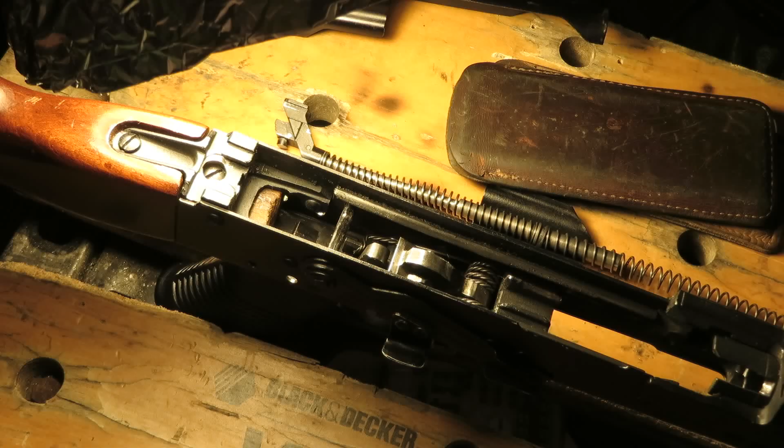Hi, so I wanted to show how a well-tuned Kalashnikov trigger works. Well, actually, any Kalashnikov trigger. This is specifically a semi-auto action since I'm a civilian in the USA and I don't have the good fortune of owning a pre-ban AK. Actually, it's a very similar mechanism to an AR.

A stock Kalashnikov trigger is very crude and rough, but it's actually one of the easiest triggers to make very nice and smooth. Easier than tuning an AR trigger, although the principles are fundamentally the same. So, the way a trigger works, as you can see, this hammer wing, which would strike the tail of the bolt here. I'll try to get that so it's not in shadow.

Okay, there we go. Basically, the hammer hits that, which is the firing pin, which sticks out of the bolt, and pushes it out of, let's rotate it around so the light is right, the front of the bolt. I think you can just see that firing pin sticking about flush the way I'm poking with my finger. With inertia and the hammer, it will actually poke out of there, probably a little less than a millimeter. Anyway, that you probably understand. And frankly, a lot of you probably understand this mechanism well.

But apparently some people who sell guns as professionally converted don't, because a friend of mine saw my nicely running Saiga and was impressed with it, and said he had one too that he had bought from a store as professionally converted, and that it would occasionally fire unintentionally. And so I listened to his description of it, and I was like, well, there's a possibility that it's him, or there's a burr or debris on the engagement surfaces of the trigger, or a failed spring in the disconnector, or it could actually be a badly done trigger job.

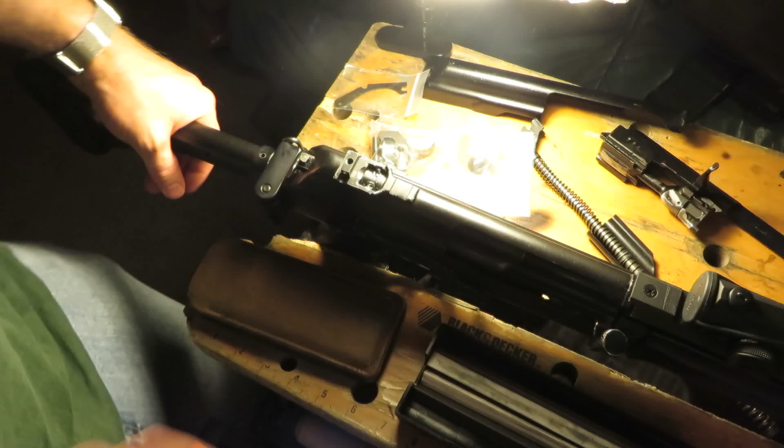So this is the so-called professional conversion that my friend bought from a gun store. I have no idea who did this, but it has an original Russian spec forend with the rail. It's got a Tromix shark brake, those are decent. This was a thing that was made, oh, it's an actual Ultimak rail. Okay, I thought it was the EOTech one.

This is a Tromix brand honey stick charging handle, but they kind of welded it on at an odd angle for somebody who was planning to use an optic. Like if you wanted to reach over the top, tilting it forward was a goofy way to do it. And it also apparently had some kind of welded on back sight. I'm not sure what that was, maybe an HK type sight. That would be the normal thing to do.

They did not TIG the holes here. They used a back block, which I'm not sure if it's welded on or not, but these are just some things: if you're buying a Saiga 12, what sets apart a professional conversion is whether they riveted or welded on the trigger guard, whether they TIGged the holes, whether they used an adapter block in the back or welded on a plate.

Can't quite see without taking off the cover whether this is a screw-in adapter or welded on. I think it might be a welded in plug, possibly the one that TAC 47 sells. But the welding here doesn't impress me. I'm not trying to be harsh on his gun. But here's the real problem that I have a big problem with, and that is how the trigger group is done. Now, as I described before, you can see, I'll go zoom in on that.

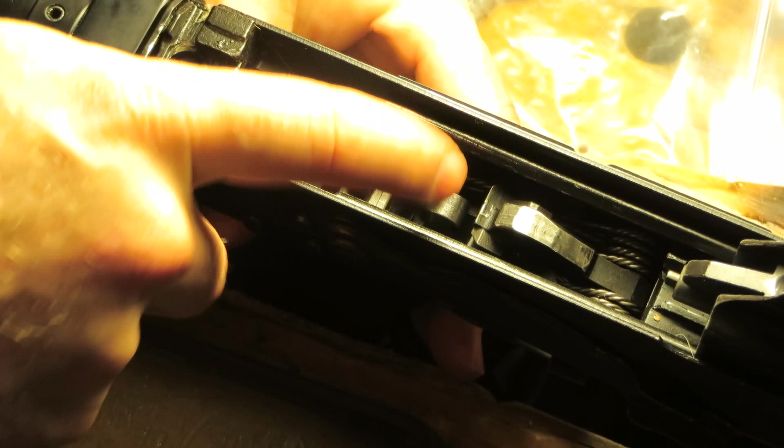The trigger group has a fair amount of hook, but they've shortened the front or the rear edge of the hook so it has less engagement. This is a single hook trigger, and they did some profiling on the hammer face, but it's basically square on the front edge. The rails haven't been polished, which I wouldn't call negligence. It sort of depends on the price point of your conversion job.

They also installed the pistol grip screw in quite a weird way now that I look at it. So they didn't use the standard AK hole, they enlarged the former trigger hole forward. So the pistol grip nut doesn't have a positive stop in the rearward direction.

But if you watch, I'm going to hold the trigger, release it, and I'm going to hold it slightly forward and push this slow. And it catches on the disconnector, and if it slips off slightly, it'll do that. It just did it. It pushed the trigger forward while I had slight pressure on the trigger. And it won't do it every time.

If you hold the trigger firmly and then release it quickly, it will catch. But it's possible to make it skip. There, I actually pulled it too much. There, it hooked properly. So it's not constant failure, but it's possible to do it unintentionally regularly.

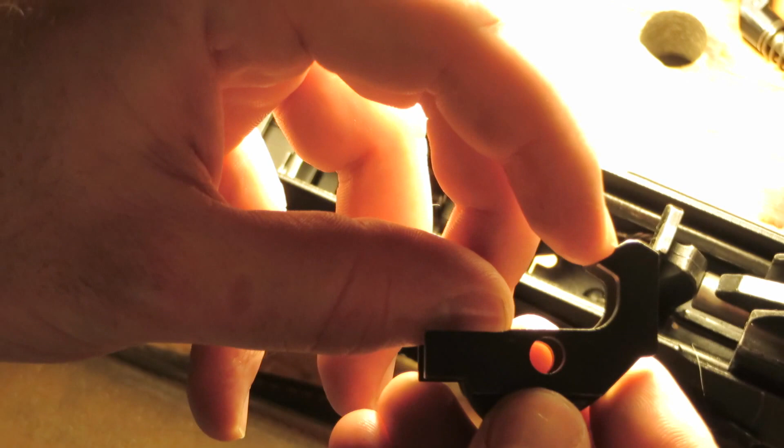They changed the angle on the front of the hook, and they shortened the amount of engagement by filing the front of the hook. As contrast, here is what an unmodified double hook looks like. The angles are the same, but they shortened this surface. Let's get that in shot. They shortened this surface on the left hook. I'm showing the right one because it's in there. And they steepened this angle like I'm showing with my fingernail.

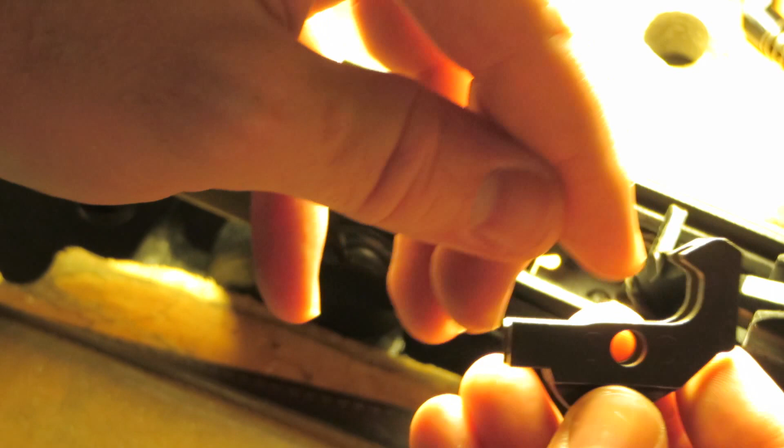And that's causing it to push that forward if it catches it with kind of impact as it slips off the disconnector and the trigger is partially pulled. It should exactly match that angle. Because they did that, they rendered this trigger unsafe.

So what we're going to do, get a pointer, is use this double hook trigger in a single hook gun. Now as it pivots forward, this corner right here will hit the floor of the receiver and prevent the trigger from being able to do full stroke. So what some people will do is cut off the hook. But no, we're going to call that a feature, not a bug. And instead we're going to cut a step in this trigger so it just barely runs into the floor right when your trigger has released, therefore eliminating over travel.

You now have an over travel stop that cannot wear out or rattle loose ever. And so you get a nicer trigger with a smoother, shorter throw. And on the other side back here, we can normally use the trigger guard screw or rivet to hold a washer down that will sit underneath where the knife point is here, and that will eliminate your pre-travel. Now, if you go and eliminate too much pre-travel, you won't have sufficient engagement and you will have an unsafe trigger. You need to have at least 1/16 of an inch of engagement on the hooks. The exact amount for your gun will vary.

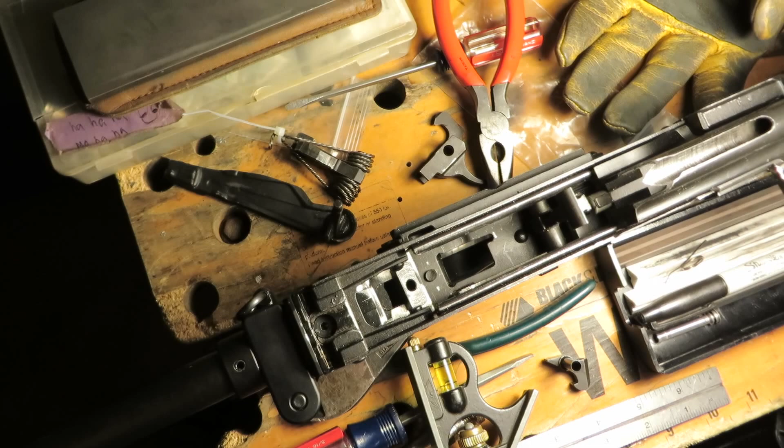So, next thing is that I'm going to pull the trigger group out of here. You don't need to see that. Look at, say, Carolina Shooter Supplies videos if you want to see how to do that. But what I want to show here is how you modify the trigger group. So this point here will run into the bottom of the receiver. If you look into the receiver, you will see there's a slot on this side for the hook to go through. So right there. It's kind of hard to indicate. And on the other side, there isn't.

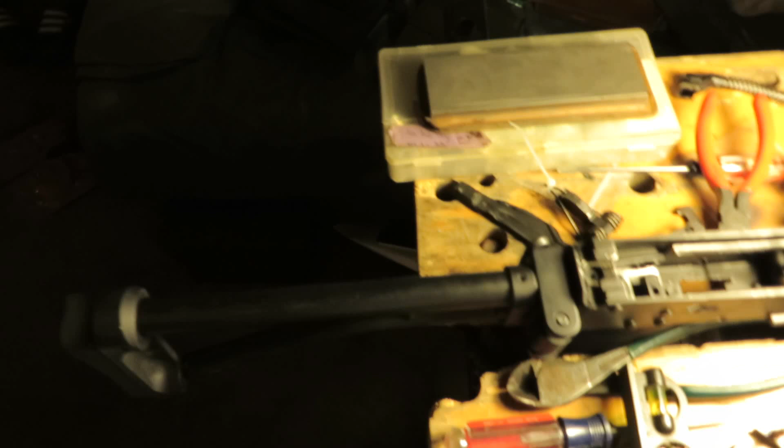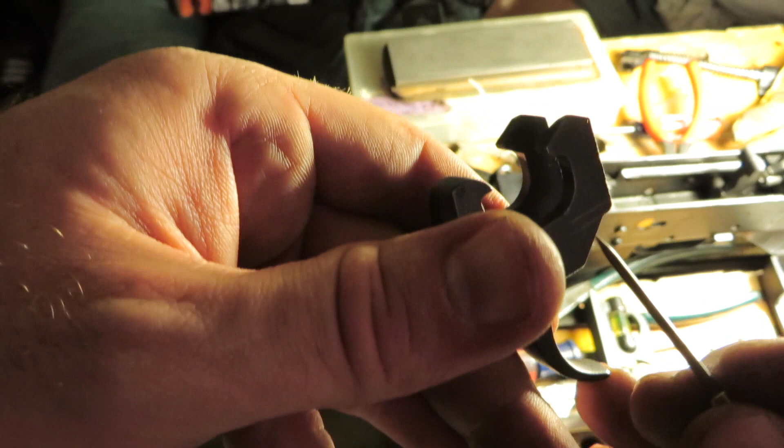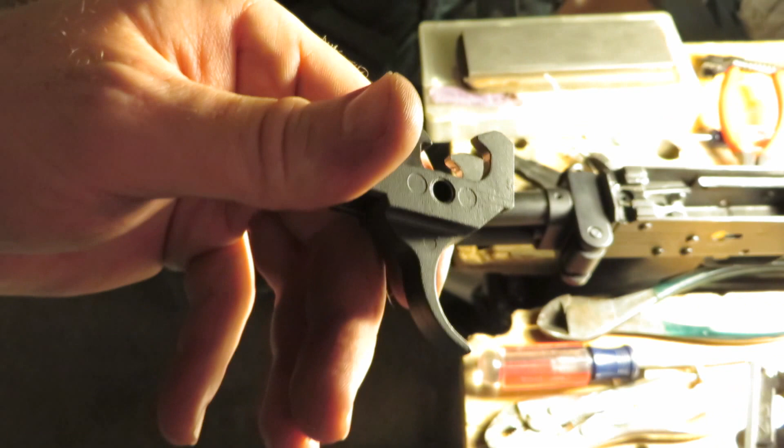So this hook is going to hit, let's rotate it. This hook right there is going to hit the floor of the receiver. And the way to solve that is to cut a little step there. Now you can see I've scribed a couple lines there. The way you do that is you hold a square against the front of this like so, and scribe a line. It's much easier to do if you chuck this up in a vise so it isn't all wiggling around like it is in front of the camera, but you get the idea. Very small increments in change here make big differences in the amount of trigger travel.

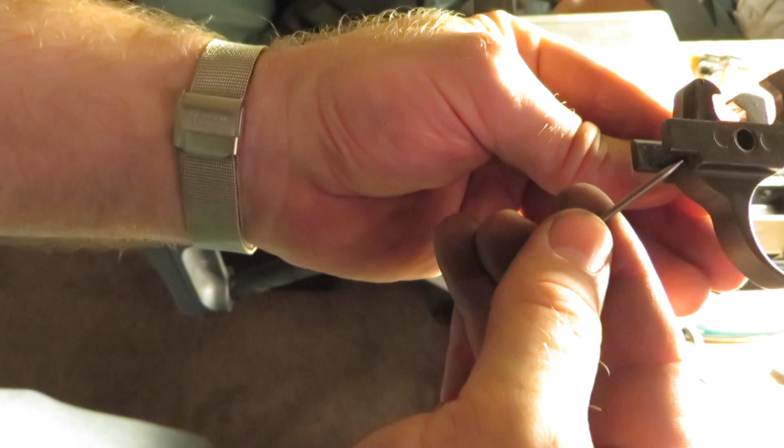So if you think of this thing pivoting, when it hits the floor of the receiver it stops. That's your over travel limiter right there, when that bumps the floor of the receiver. This side limits pre-travel. Having a washer under here, which I like to cut a square washer out of sheet metal and use the pistol grip nut or the trigger guard screw to pin that down to the floor of the receiver so it can't move around. That will limit your pre-travel. If your over travel will allow it to fire and you have a little bit of extra clearance, it will be safe. Pre-travel is more touchy for safety. So leave yourself plenty of extra fudge room on the pre-travel.

So what I'm going to do now is take it outside and grind a little bit of this away and then file it. And it's going to be like 2 swipes of the file and then a check for function. Like I said, say removing a 64th of material here will add maybe a 32nd of movement in the total trigger pull. So we're going to go slow.

Okay, so I actually had footage of stoning the trigger that I was showing earlier in the group, but unfortunately I managed to hold the parts that I was stoning just out of shot. So I'm essentially recreating that footage without the correct double hook trigger, so please bear with me a little bit. So this is actually the defective trigger group that I pulled out of that gun. You'll notice there's a little filing mark here, which is proof where he changed this angle. Again, he made this angle steeper, like so, versus something like that. The original angle was approximately where the graphite is now. And it is now like that, if that makes sense.

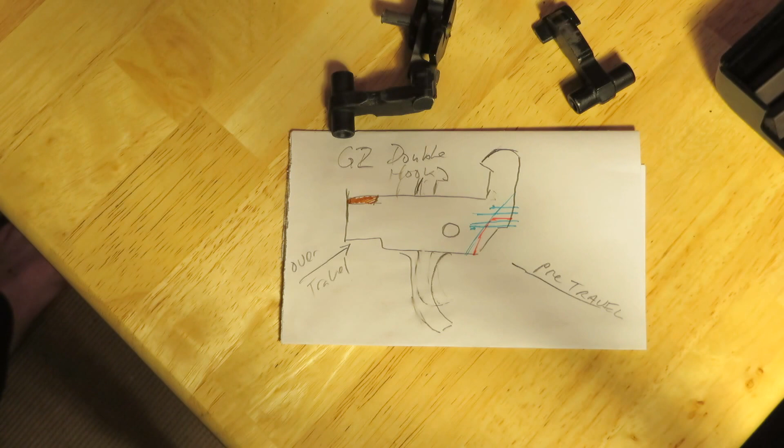So that's why this trigger is unsafe, and just the tiniest bit was clipped off of this corner right here. That was all it took to render this trigger unsafe. Do not change this angle. It's unnecessary. By all means, polish and refine this surface, but keep the angle the same, and don't round the corner any more than it is already. Almost a sharp edge, but just short of being actually sharp is what you want. So if it becomes sharp when you're stoning it, you probably removed too much material. A little bit more talk on stoning it.

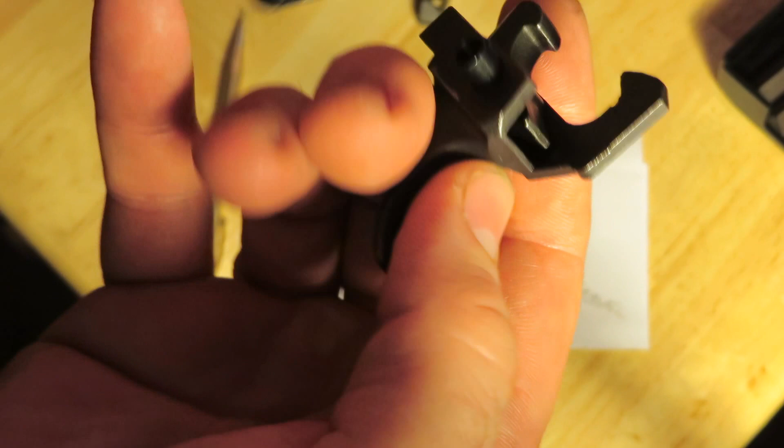So, here is a hammer. This one is from a single hook mechanism. Actually, this is the one I took out. You'll notice down the middle of this whole part is a casting line. And the disconnector, which we see here, grabs right on that casting line. Oh look, the only spot on the hammer that's rough is the only spot that matters. And the same thing is true of the underside of the disconnector. This is really hard to light in such a way that I can get that to be visible, but if you look at it, hopefully I can get that to catch.

There we go, you can just barely see the line, but there's a shiny spot right in the middle. I'll try to slowly pan this. There, you caught just a little bit of the shiny. And that tells you that all of the force on this disconnector is grabbing in one spot, and all the force on the hammer wing is grabbing on one spot. And that makes it gritty.

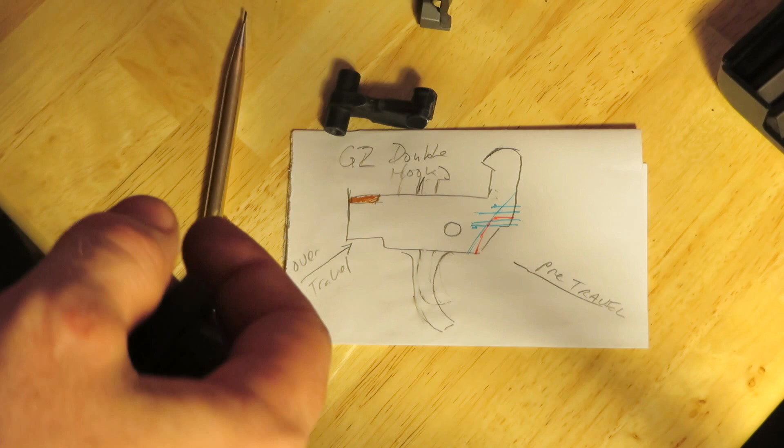Normally, you can get something like a good quality diamond sharpener, such as this EZE-LAP brand medium coarse one, and then progressively finer, and keep the angles exactly the same. And you have to take the disconnector out to get a good hook on that, because you can see that this is changing the angle slightly. But if you take the disconnector out, you can slide this back and forth and get that true. Normally that will take about 15 minutes.

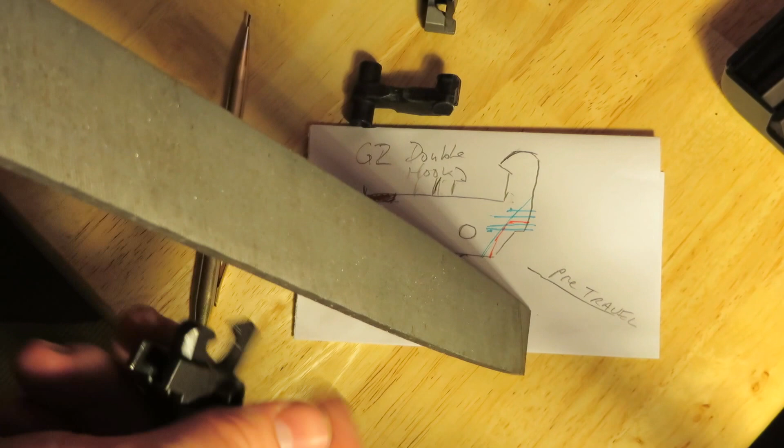The one I was working on yesterday was actually the worst I'd ever seen. I spent a long time, and I ended up taking a file and very carefully moving the part along the file, just about 2 4-inch passes, and that cleaned it up. I wouldn't recommend files to you. I would say stick with stones or a diamond file, which is much less aggressive than a file.

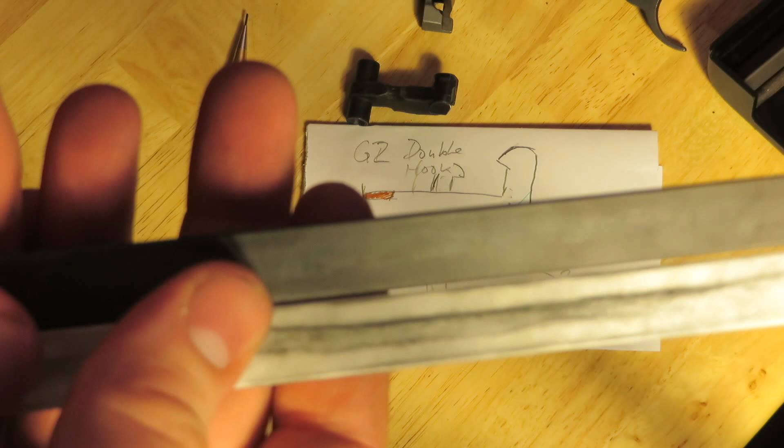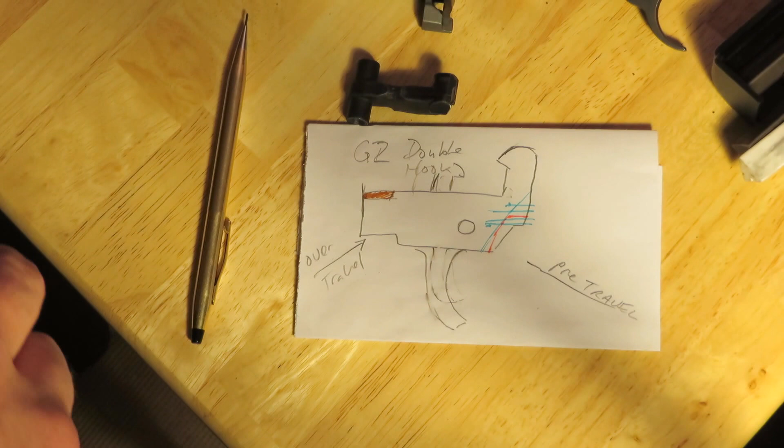And then as you get finer, either take very fine automotive sandpaper like 400 to 800 grit and wrap it around a ruler or a file and slowly move it back and forth, and you'll very quickly come to a very fine polish. Or if you happen to have it, ceramic knife sharpeners are very good. They're very consistent. You see some gunsmiths spend a lot of money on Arkansas natural stones that are very, very fine, and they make a big deal out of it. It's mostly mysticism. Honestly, synthetic materials like ceramics are more square, more precise, more consistent at their cutting rate.

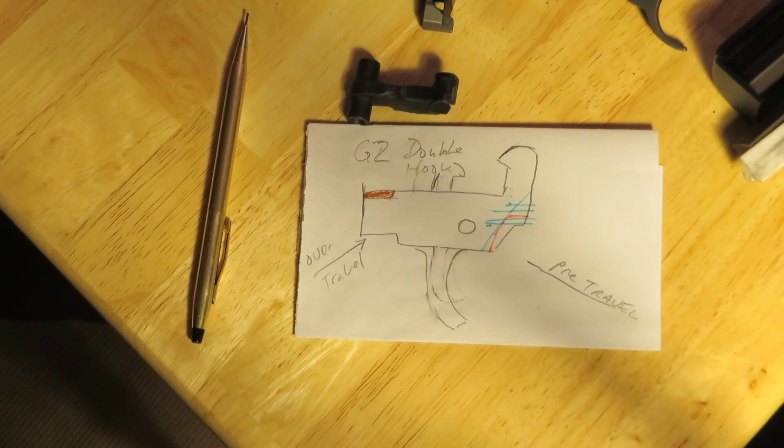So if you want a good fine polish, you don't have to spend a bunch on tools. You can literally go down to Walmart and spend $3 on a 3M multi-grit pack of automotive sandpaper and wrap it around a ruler or an old credit card and do every bit as good as those fancy stones. Helps to water it.

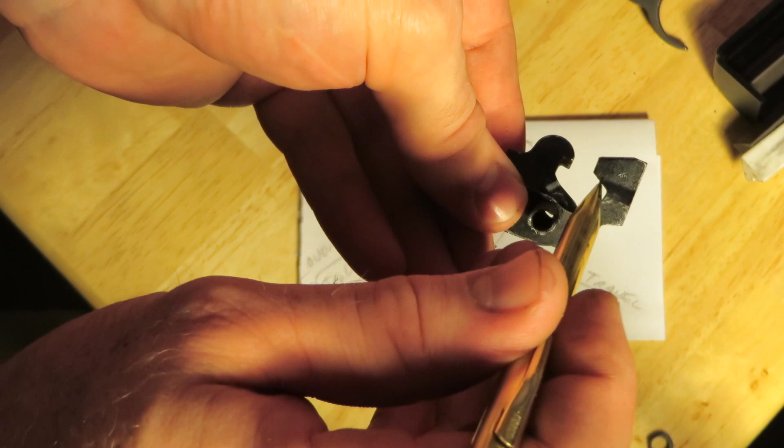And so the surfaces that you need to polish are the underside of the disconnector, the engagement surface, and when you have a double hook, you'll typically find that the planes are off in this plane. Try to keep my hand out of the light. Between the 2 hooks, and also that there's unevenness in this plane. So polishing it without really removing any metal, just uniforming it, is what your goal is.

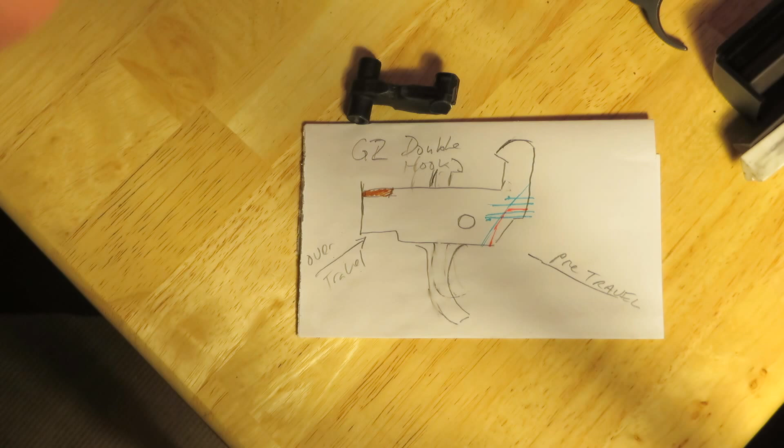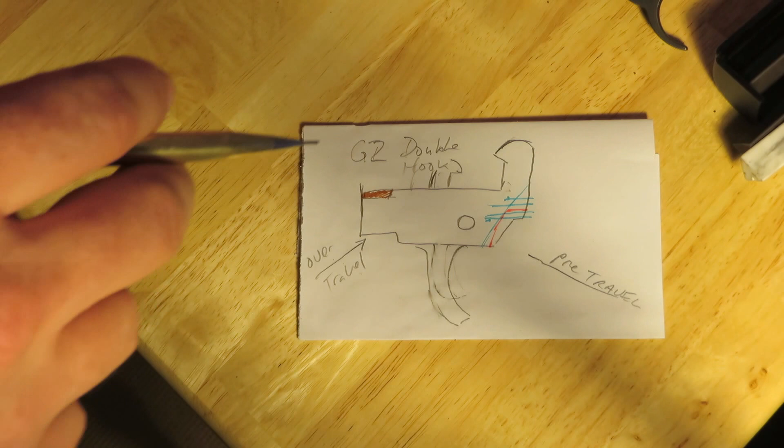This one fell apart here. Anyway, so also this surface here where the hook hooks, and on the other side there will be a bigger wing on the double hook trigger, but basically anywhere metal rubs on metal, polish it, make it shiny. Don't change the angles. What you are going to change is unnecessary movement before and after the engagement. And that's what this drawing is about.

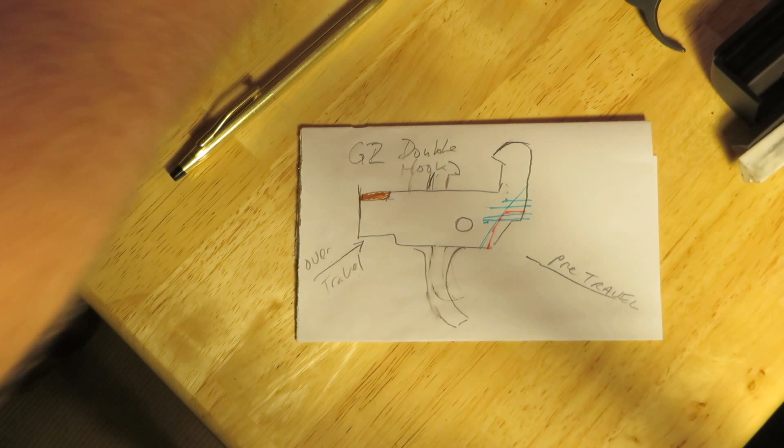I will zoom in on it in a second, but I'm going to show you a factory trigger from one Russian import. Oh, and incidentally, those casting lines are common to pretty much every AK trigger out there, except for some high quality ones like Jarred, which I wouldn't buy because they break, and the RSA Red Star Arms, which is an excellent adjustable trigger. But even that is improved with a little bit of a polish.

So here is a factory trigger group from a Saiga. It's just the same, except for, oh shoot, well, that thing fell apart and I can't push it back together, but this little bit here is an over travel stop. As the trigger rotates forward, it limits its travel.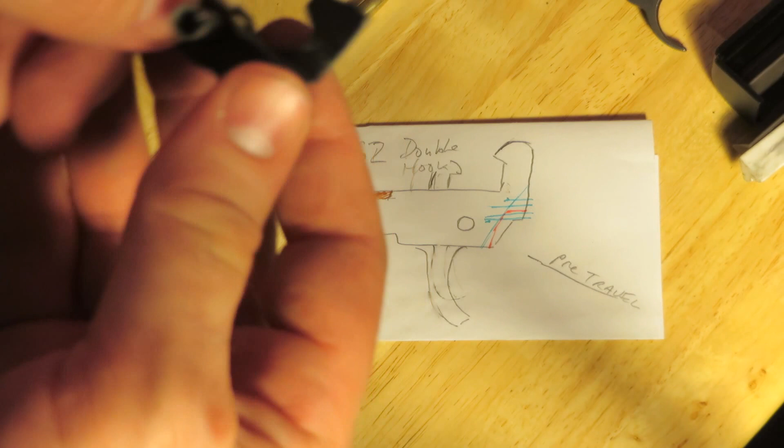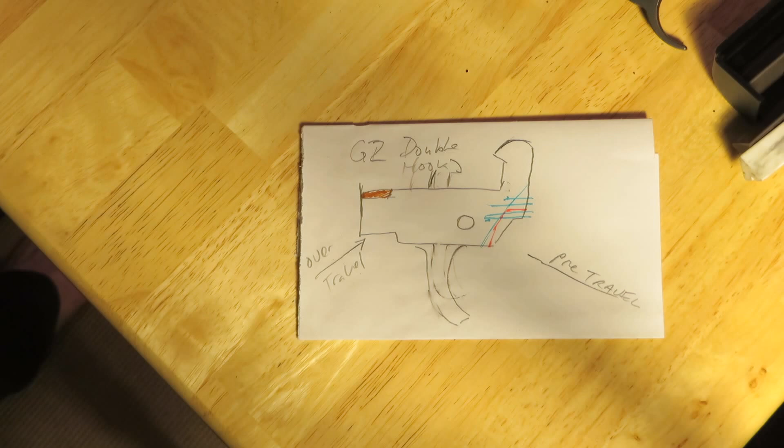Various AK trigger groups use different mechanisms. Some AK types have a rivet that limits pre-travel and another rivet that limits over-travel that the trigger body will bump into, or some feature added onto it. Having those rivets too tall or too short or in the wrong place can cause awful trigger slap, as can also the carrier hitting this portion here if it's a trigger group that isn't really intended for that spec of AK.

And that will be quite painful if you're getting that one. So anyway, how do we limit over-travel and pre-travel? You have to start with a double hook trigger in a single hook gun.

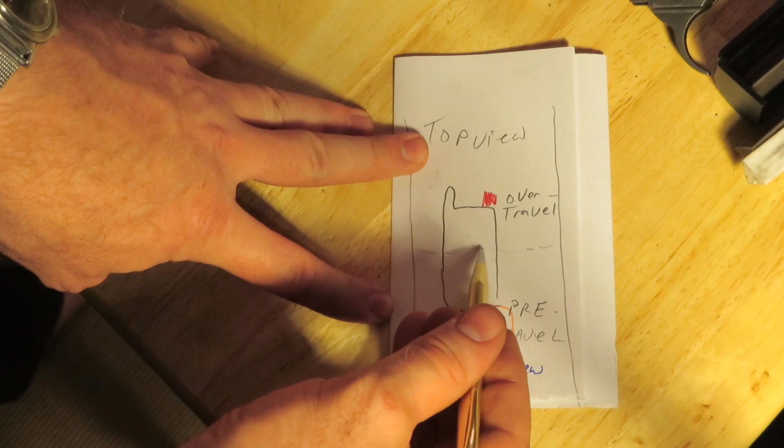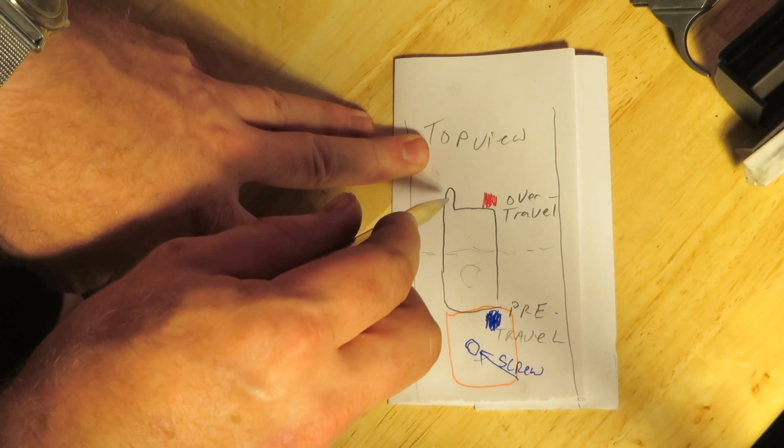And the reason is, if you look at, and this is a top view of what you would see, the hole cut out through an AK that the trigger body goes in. This dotted line here, which shows up faintly, would be roughly the pivot point. The body of the trigger is here, the hooks are up here, the disconnector would be about here. And there's a little cutout in the floor of the receiver for the hook to pass through, right there.

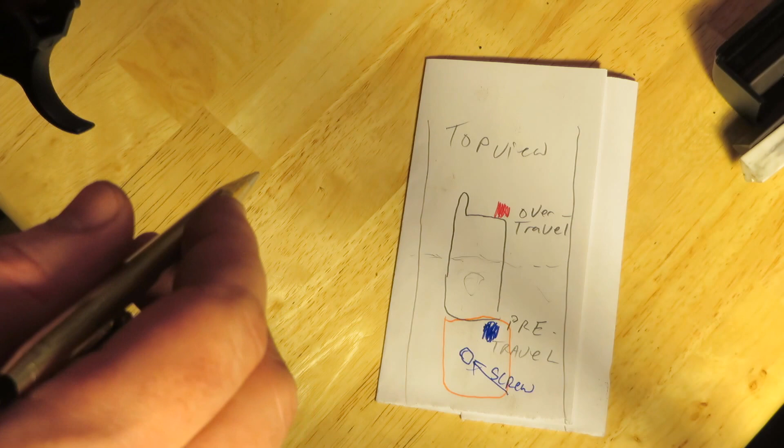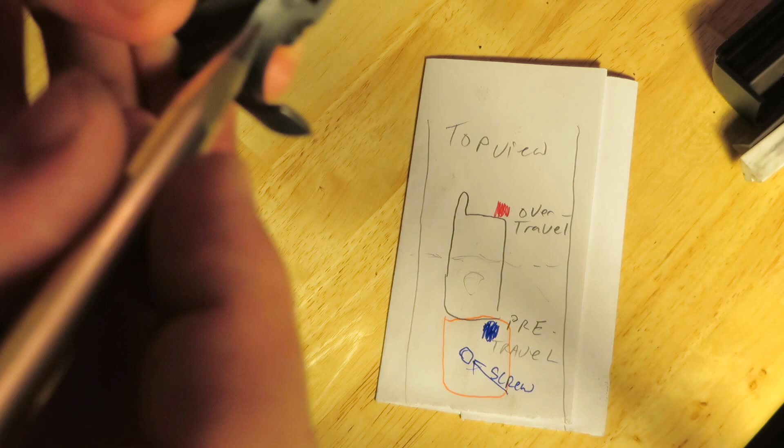But there isn't a cutout on the other side. So if you put a double hook trigger, it will hit the floor and it will not pivot, and you can't make it work. So you can cut the hook out of the way. But actually what you have there is a huge advantage. You have some material built in as an over travel stop that you can adjust. So the first thing you're going to do is basically shave off a little bit of material right here so that that will clear the floor.

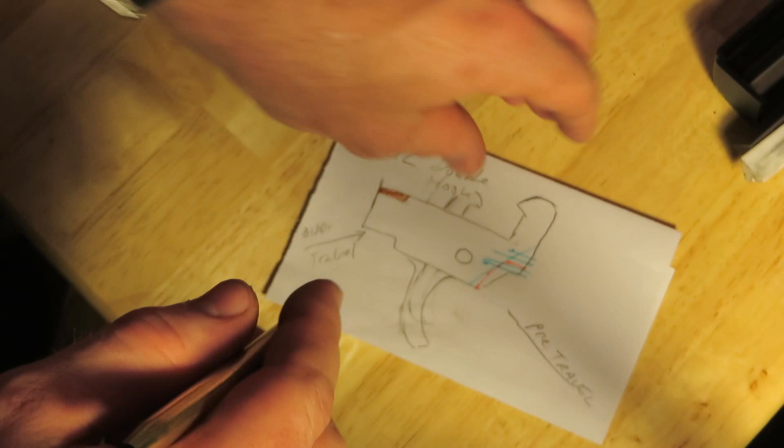So here is a drawing of the G2 double hook before you've modified it, the pencil lines. And what we're going to end up with is approximately the red line. So we've clipped off a little bit off the front of the body to make sure it clears the floor. Do make sure that happens, otherwise all your adjustments here will be wrong. If this is hitting the floor, you need to just trim it back just a shade more. And we're talking about hitting in this area right here.

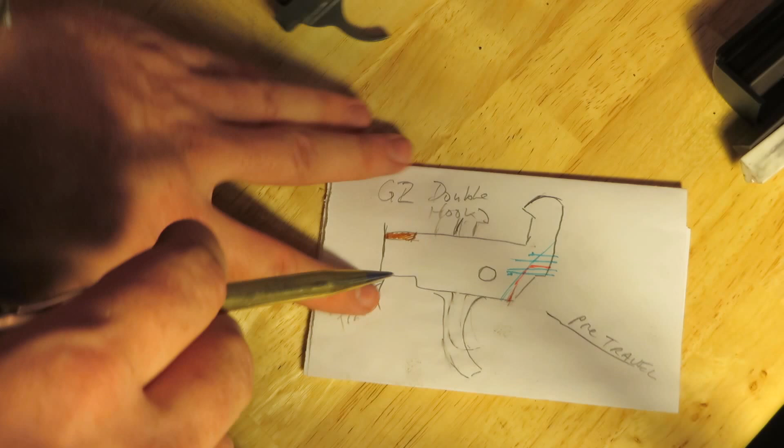So you don't have to take much, maybe a 64th, maybe a 32nd, it kind of varies, but you'll see just a shiny silver line here, and there's kind of a notchy spot there and a notchy spot there, and you basically go till the notch is gone on both sides. Let's make sure I had that in shot. So there will be a notch roughly here, and a notch roughly here, and you just shave vertically until that notch goes away.

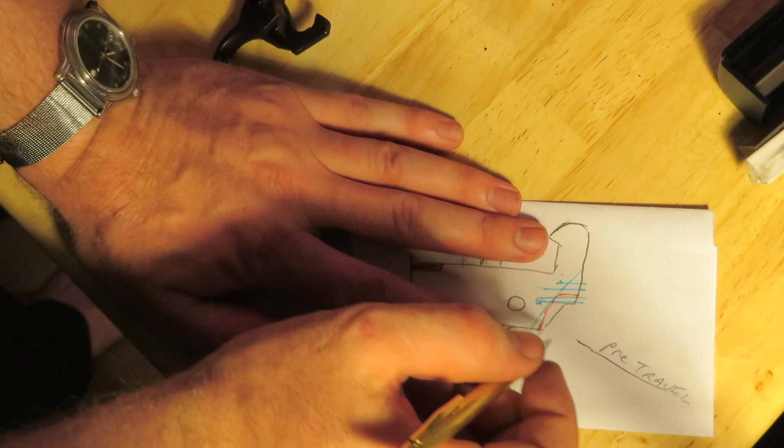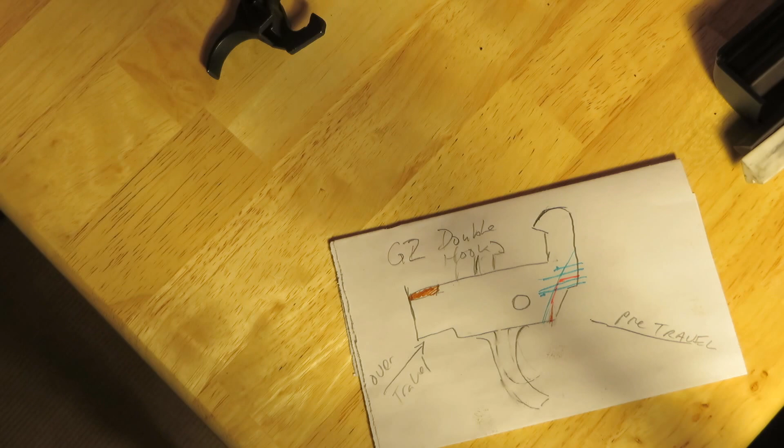I'll get into the tooling that I think works best for this in a second here. I would thoroughly suggest you stick this in a vise. So about the first thing you want to do is grab a square. And you're going to hold the square against the trigger hook. I have this on the wrong side of the trigger hook since we are dealing with double hook. And you'll scribe lines like so. Much easier to do with the trigger body in a vise so it's held steady.

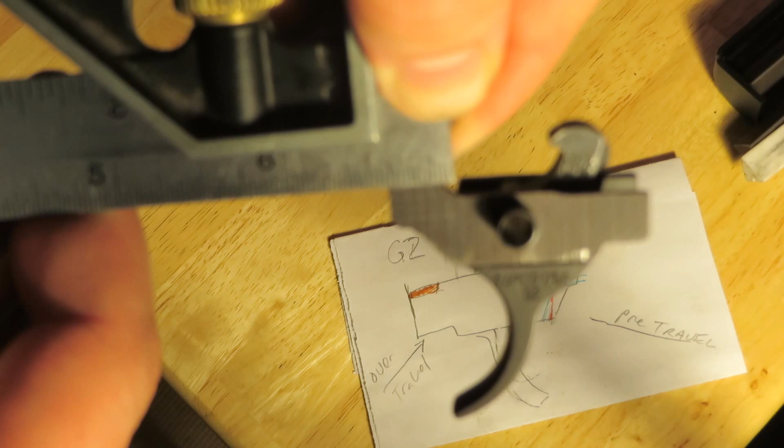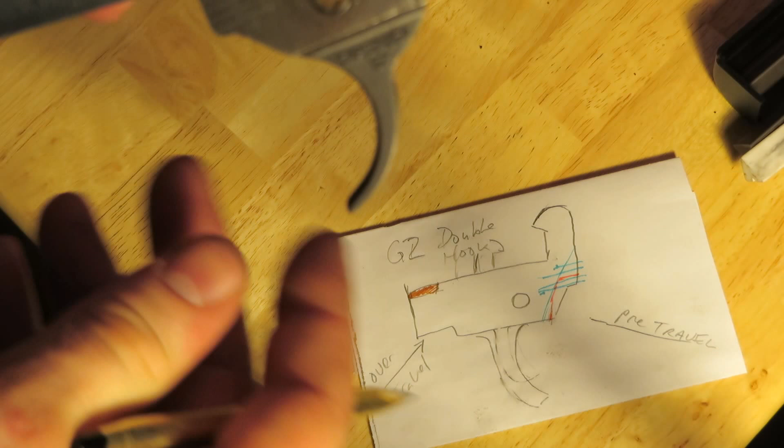And now you can see I have several parallel lines that are reference marks. And we're also going to draw another line this way to make sure that we leave enough meat on the hook, so to speak, because it's only really the corner that we care about. We're just keeping them parallel as a way of keeping track of progress. So you're putting a safety line here and measurement lines going horizontally.

Now, what you're going to do then is cut out this material here up to the first line, stick it in the gun, and push the trigger pins in and the hammer pin, and make sure that they're fully seated. You have to have them fully seated, otherwise your test fitting will be inaccurate and will cause you problems. Maybe you'll remove too much material, maybe you'll put the gun back together and the trigger won't release.

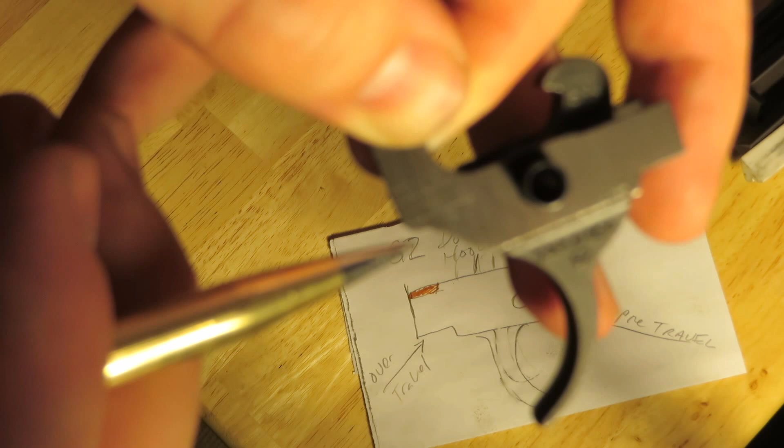Neither one is good. Make sure the trigger pins are held all the way in, and you basically function test it without any springs, with just your fingers, while holding the trigger pins, or the axis pins, in with your left hand. So, looking at the drawing here, I'll zoom in on that just a little bit more.

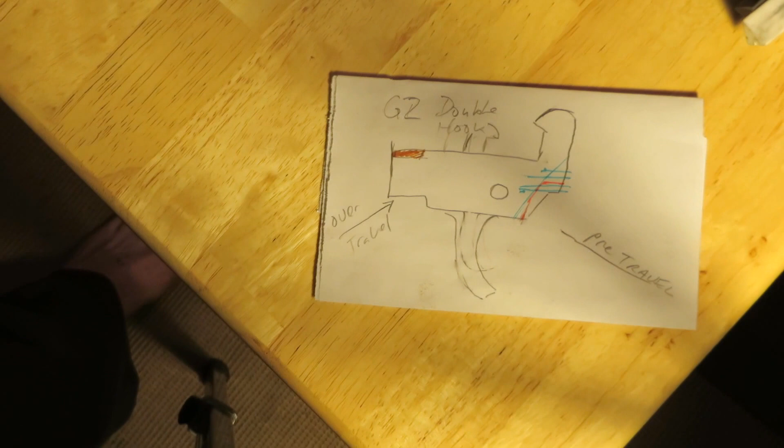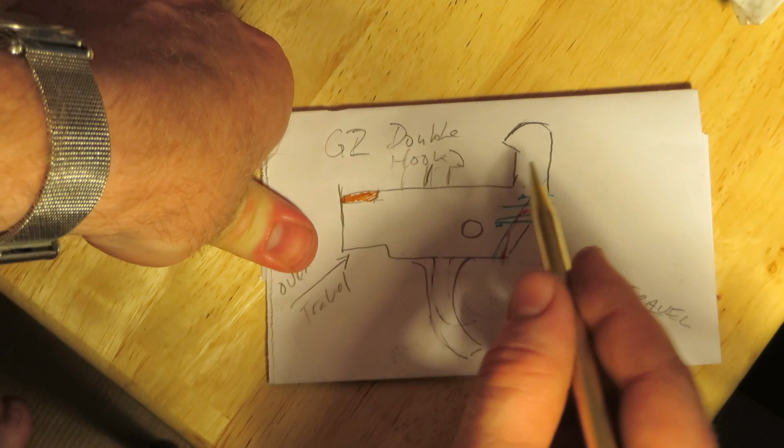So, if we look here, you'll see you will end up removing approximately 1/16 of an inch. Again, the settings will be determined by what allows the hammer to swing by, just by here, and leave you a little bit of extra trigger movement after it releases for reliability.

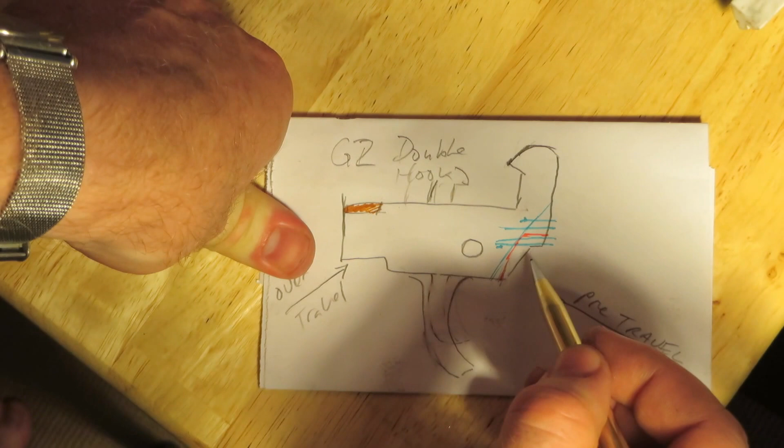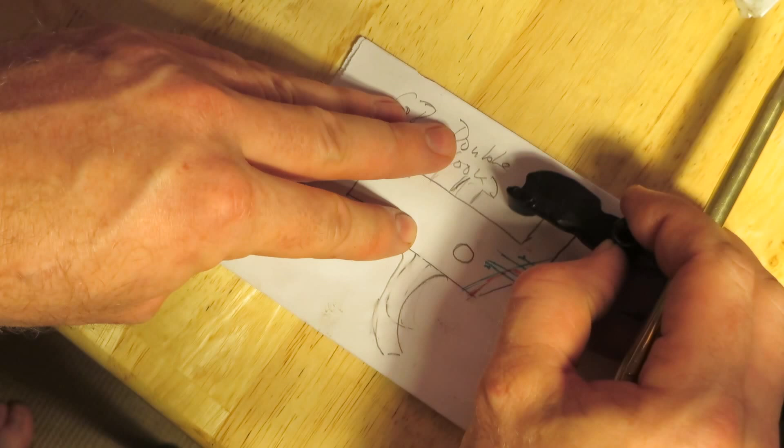Limiting your over travel can in no way lead to a dangerous condition unless you limit it so much that the hammer wing, which I'll actually just demonstrate with a hammer wing since I've got one, has to be able to get past this. So if the trigger won't swing far enough forward for the hammer wing to swing past, then you've got a problem. So you want it to be able to go forward just enough that that wing can swing by, and a little bit just for tolerance, basically.

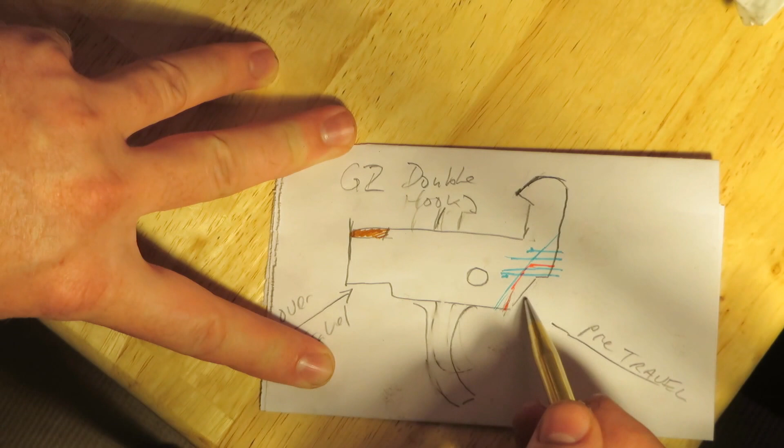So a good rule of thumb is about a 32nd of over travel is nice to do good follow through on your shot without slowing you down much. Personal taste. Some people like more, some people like less, so adjust it to what you like. And so notice I gave myself extra guidelines before I even started cutting so I can measure my progress and go and just test and fit until it works.

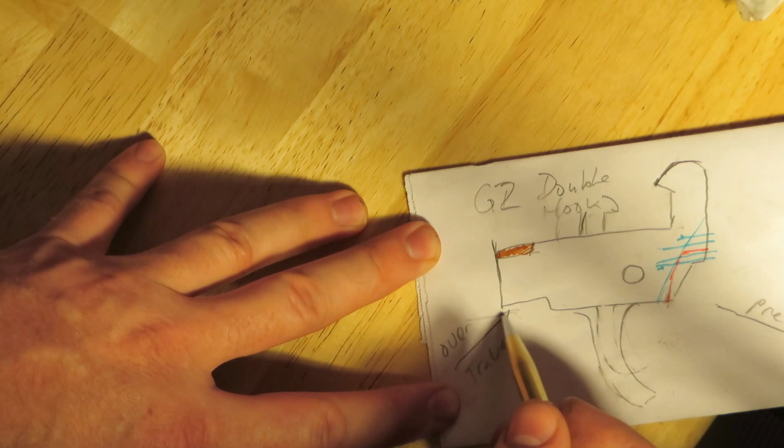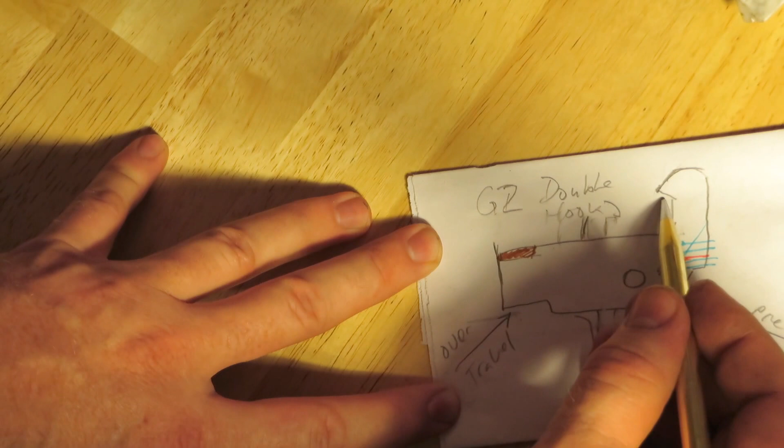Now for the pre-travel or take-up, you put a spacer under here. A large fender washer will do. You're typically looking at around a 1/16 of an inch, but the critical thing is you have to leave yourself plenty of engagement here. You want at least about a 1/16 of an inch of engagement. More is probably better. Definitely don't get down to a 32nd.

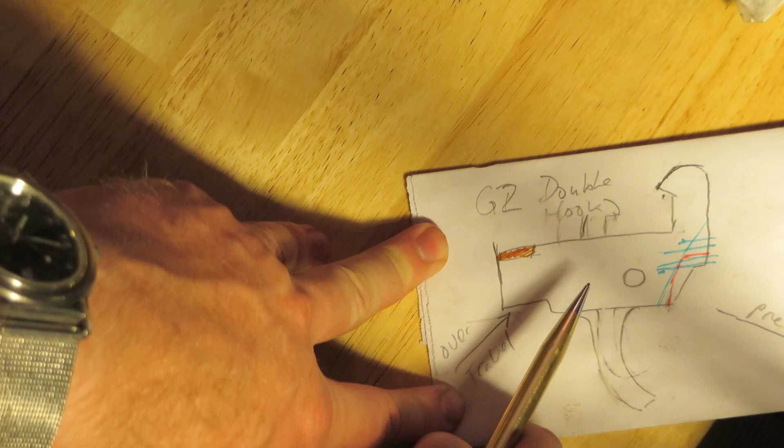A lot of the time they express these sort of things in thousandths, but the point is, as things wear, you want them to have extra safety margin, and you can get down to a ridiculously short pull and still have more than a 1/16 of solid engagement. So that is your most critical thing.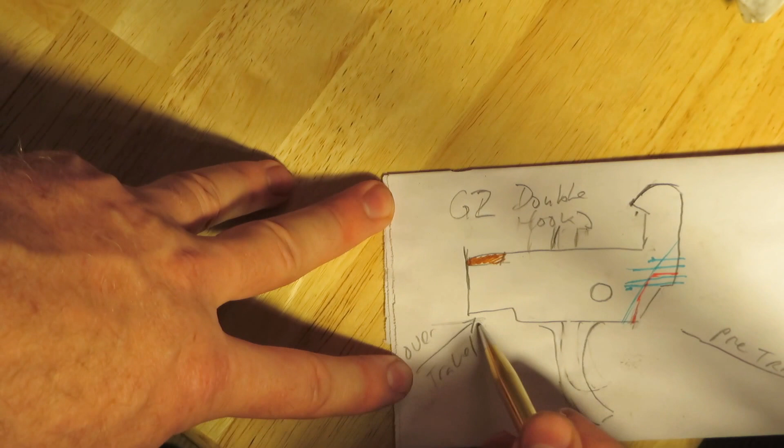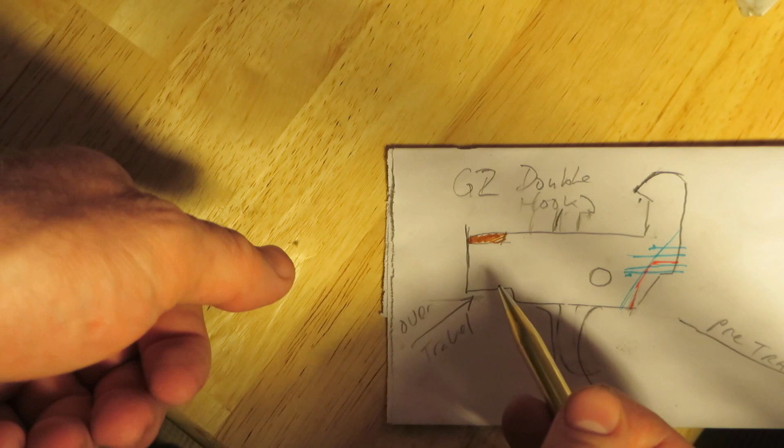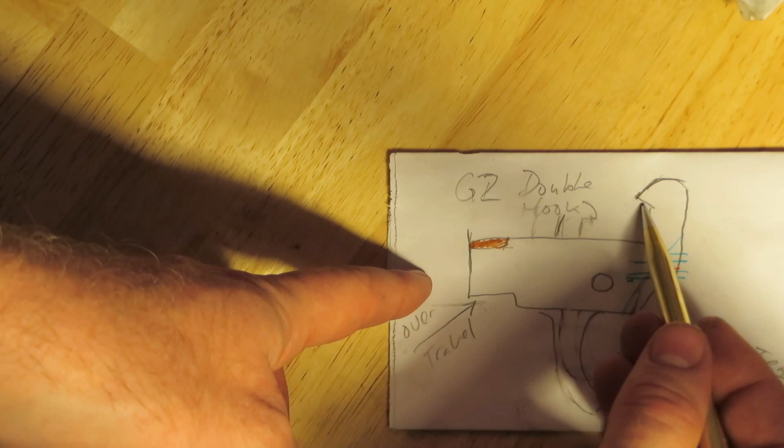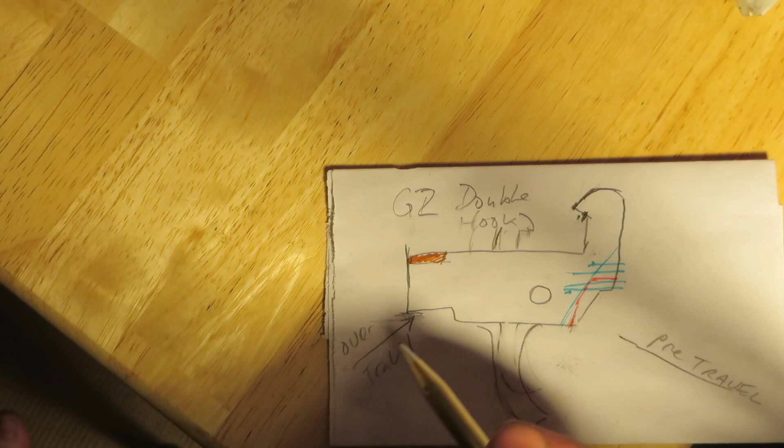A good way of checking what's going to be the right thickness of metal to go under here is to take a bent screwdriver tip and assemble your action with the spring on the hammer and basically bring it to the break point and then bring the trigger back to where the hammer is about here. The hammer wing is somewhere in the middle of that, and slide a screwdriver underneath here and mark on the thickness of the screwdriver where it is, and then cut your metal in about that thickness and file it thinner if you need to.

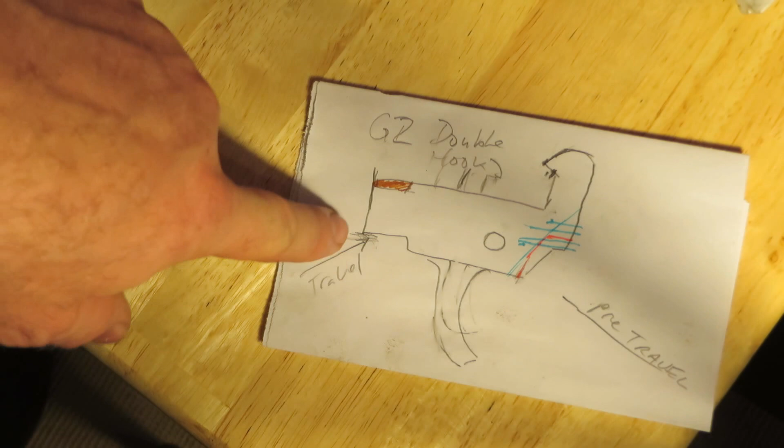Again, this is the most critical one that you can overdo and render your gun dangerous. If you don't do this at all, your gun will be safe and will still have unlimited over travel. So my point is, I don't like a part that can come loose, so I prefer it to be pinned underneath a permanent part of the gun, preferably the trigger guard rivet. And I like to make a square washer rather than a round washer, just because then it can't wiggle around side to side, even if I had a loose rivet or something dumb like that. Not that I would leave a loose rivet, but you get the notion.

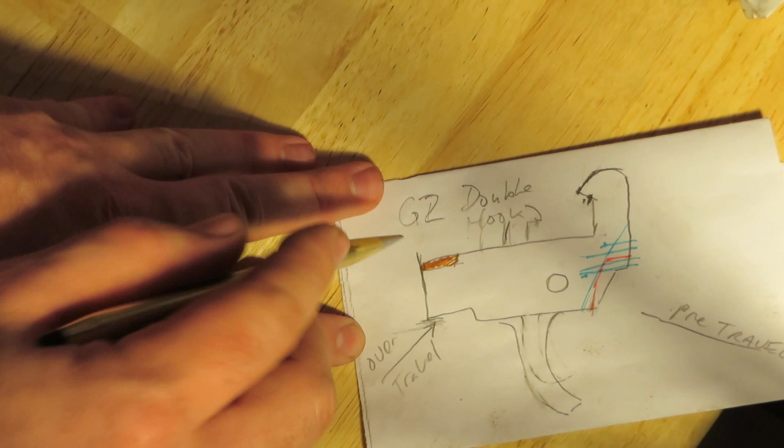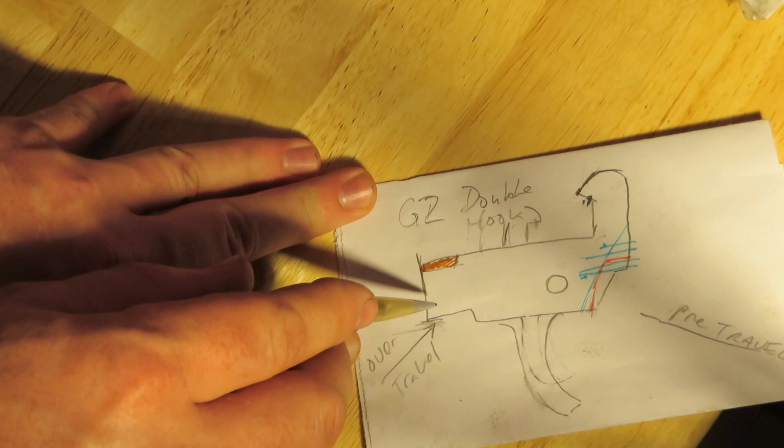And one last thing that I'm going to say before I end this clip of the video and get back to showing the actual fitting of the other trigger. If you notice this brown area here, once you limit your pre-travel, your take-up, you will often have to fit the safety. I should have taken the safety out of a gun to use here as a prop, but I didn't. So the safety tab engages roughly like this, with this corner of the back of the trigger body.

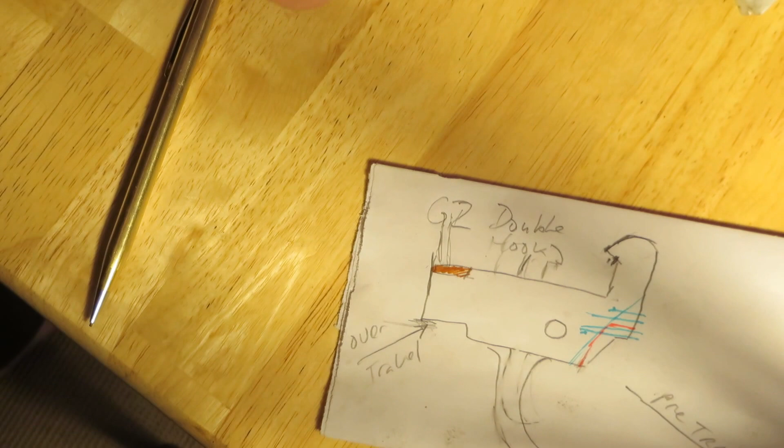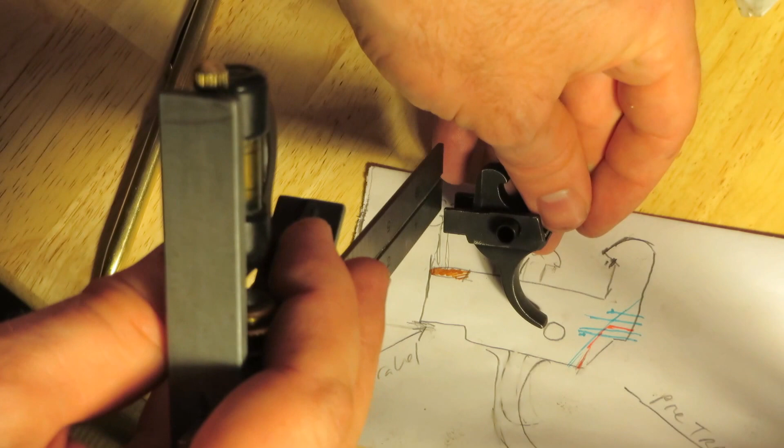Basically, it sits right here, and it pivots out of the way, and it pivots on top. Now, as you rotate the trigger forward, this will sit higher, and the safety may not slip over the top. Now, what most people will do is go and shave off a little corner of the safety. I would advise you not to do that, because right now you have the opportunity to get something a little bit nicer in your gun.

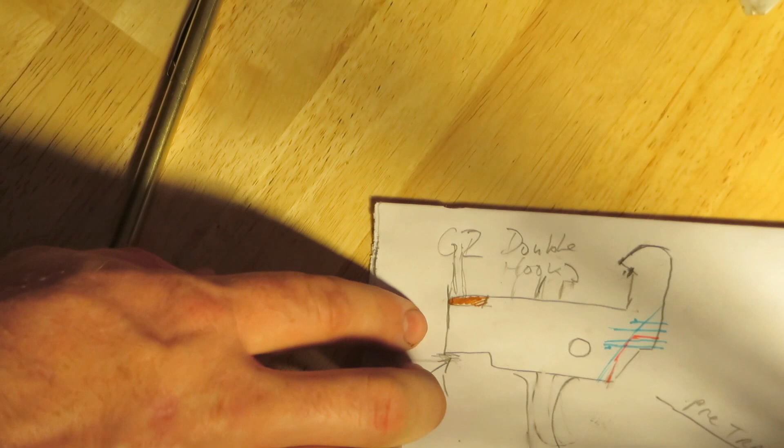Rather than fit the safety to the trigger, I would suggest you fit the trigger group to the safety. If you remove a very, very slight step where I've shown the brown here, and I've grossly exaggerated that, I'm talking about usually removing, say, 1/1000th, but the point is to kind of leave a little bit of a notch at the front of the safety stroke.

And the point of that is, what that notch will allow it to do is, as your safety rotates forward, it will bump to a stop there and cannot rotate too far upward into your dust cover unless you give it a very deliberate nudge to make it skip over this hump. And one thing you'll find with a lot of home converted guns is that their safety swings too far upward. It isn't dangerous, it just looks sloppy.

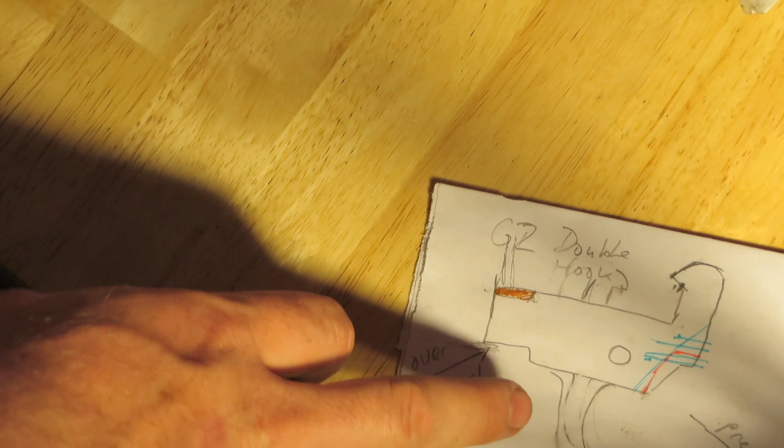So here's a way you can make your gun a little bit nicer, just that last kind of pro touch that gives it that extra attention and makes your gun a little bit nicer. I have just started the notch in this trigger spark. You can see right there.

And I basically brought it up to where the corner initially was, and I had this line scribed to give me a measurement of progress. I'll probably need to take a 32nd to a 16th more, but this is just put it in and try and see if you can get the trigger to function, or if the hammer will interfere with it, and if not, add a little bit or remove a little bit more until it works. So it's just an iterative check and fit process.

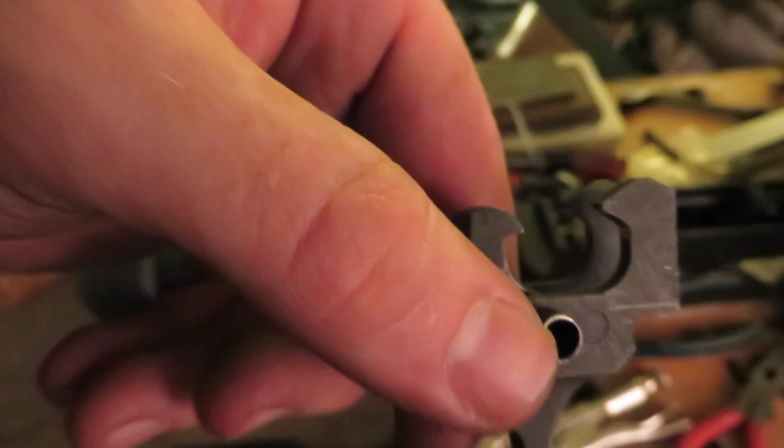So, as you can see, I removed about a third of the material between the lines. I expect I will need to get almost to the top line before it works, but we'll see here. I just keep it square and keep it parallel so I know my changes, and I keep my grind parallel to that line, and that's how I know how much change I do here is going to affect how much change I do there. If I change the angle, then I won't get the same result.

Okay, so I've switched guns to show one that I already finished, because the footage from the other gun wasn't very easy to see, but I wanted to show you here how we're checking to see the correct amount of pre-travel. And actually I'm going to pan through the gun here.

So here we're looking at the pistol grip nut, and just in front of it is a square black washer that matches the color of the gun, and you can see this screw right here, right in front of my pinky there. That is what holds together the trigger guard. I may replace that with a rivet sooner or later, but actually it's holding in just fine. But anyway, that is holding down the pre-travel washer, which is underneath the rear legs of the trigger.

I'm going to get that safety out of the way. So this square right here that I'm touching with my finger, that is the pre-travel washer. See, this leg sits on it. You'll also see a little bit of a shiny spot here. That is the safety stop notch right where my fingernail is, that keeps it from swinging up too far, as we discussed earlier. Okay, so here's how you do the fit.

Now, assuming that I hadn't fit this all the way, you don't need to have the springs in here, but you do need to hold the pins solidly in with your fingertips while you do this. But I'm going to hold the trigger slightly forward, slightly back, to simulate it hitting the floor. So as I swing this, the hammer will hit the trigger hook and not be able to swing past. So that's how I know I need to take more off the front of the trigger to give it more pre-travel. After I go take this out, remove a little more material

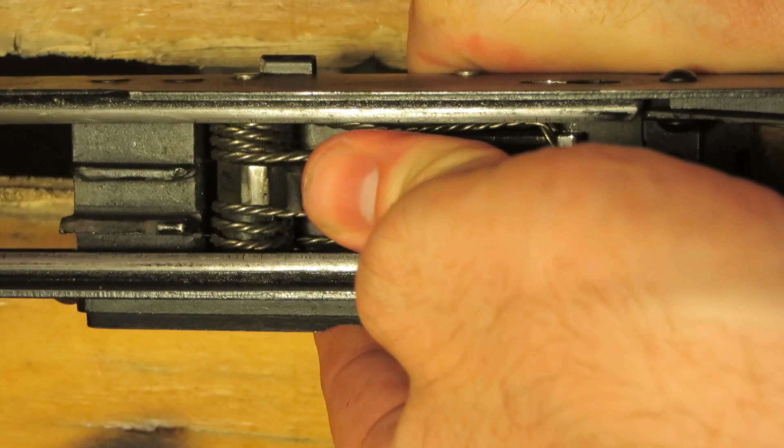And then when it's correct, as it is now, I can pull it, and you can see there's not a ton of clearance between the trigger and the hooks. There's just enough for it to function. I'm going to scooch the camera over so you can see that.